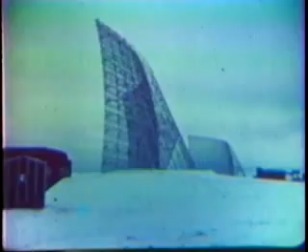Our ballistic missile early warning system tell us differently? 7, 6, 5. Not ours, but theirs. 3, 1. And if it is theirs, and this is ours? A better design on the drawing board is no immediate effective countermeasure.

Our birds must fly when they're required to. The high complexity of modern-day weapon systems demands the closest possible approach to absolute reliability. There is no second chance. So there must be absolute process control during system design and system manufacture.

Are these more imports from other lands? Or are they more exports of our own manufacture? If we are to compete successfully, both at home and abroad, our economy must expand, our industry modernize. To remain strong, to remain free, to enjoy the good life.

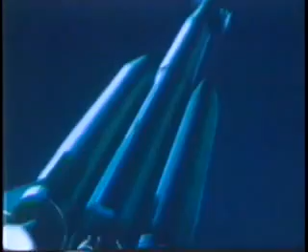We also need newer and better aerospace vehicles, and we need them fast. We need newer and better weapons, and we need to get them from design concept and into operation more quickly and at a reasonable cost.

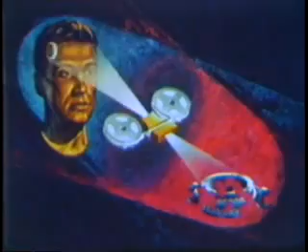We need new and better products for civilian consumption. Products which can compete with foreign goods here at home or in foreign markets. We must have modern manufacturing, as modern as we can make it. Modern manufacturing is a command performance.

Command performance. Well, we usually have enough command of our process to get the performance we want. Of course, it takes a lot of time to get from a set of new drawings to a finished product. But time is something we don't always have. The period from development to product is growing shorter and shorter. As someone said, time has collapsed.

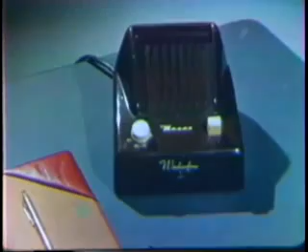Now let's try this process. Say the complete product is a Type 20K, and we're changing it with a modification of the Type XR. Now, suppose all you needed to do was to say into a transmitter, 3 Type 20K modification XR. Orders to the plant. That's right. You merely define what you want, and in a fraction of the time it would take conventionally, your product's manufactured, assembled, and ready to ship.

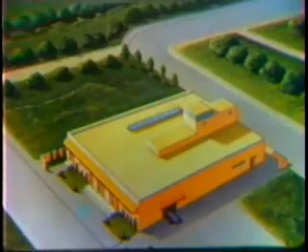And that component we were talking about is only one of many making up the complete product. How could you do all that so quickly? Not only so quickly, but in much less space. You'd need a much larger plant to do this by conventional methods. Oh, this is not conventional. Not at all. This is a modern plant. Really modern. What do you mean by that?

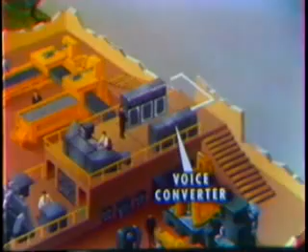When you give your command over the mic, which may be in the plant or remote, almost anywhere, the information feeds into a voice converter, which translates your language into a language which the computer can understand. The computer analyzes your request, then draws on its store of information to produce a series of tapes, which feed into a production control center. This center not only controls each of the machines, but the flow of parts as well, acting as a scheduling unit.

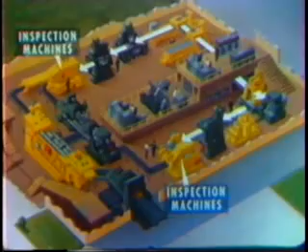Now all of the manufacturing units are actuated. Basic shapes are routed to production centers for complete processing. Completed components are then checked automatically by inspection machines, then sent on to a robot subassembler. Subassemblies proceed on to a robot for final assembly, and then on to shipping. That's what I call command performance.

Of course, I've oversimplified the process a bit. You mean you've been putting me on, don't you? Not exactly. This is not as fantastic as you might think. Take the computer, for example. Computers are fairly common today, although we still must talk to them with cards or tape rather than directly. But they're getting more sophisticated all the time. And from this information, a control tape is produced. Control tape for what? To control a manufacturing process.

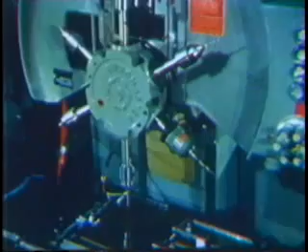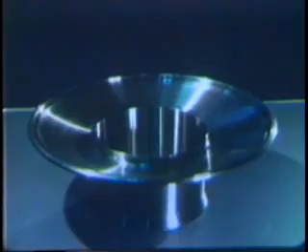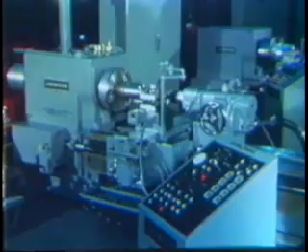Now, these machines are in existence today. Inexpensive tape-controlled drill presses. The more sophisticated turret drill presses. Vertical turret lathes, capable of high accuracy contouring. Tape-controlled engine lathes, with equally exacting contouring and thread-cutting capabilities.

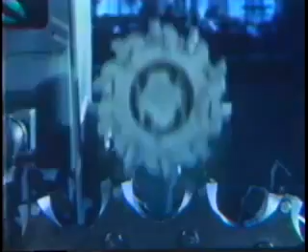High-precision multi-axis profiling mills. Machining centers that change tools, mill, drill, bore, ream, and tap. In many cases, they can complete the entire manufacturing process in just one setting. Fully capable of doing that job of yours we were talking about, and even more.

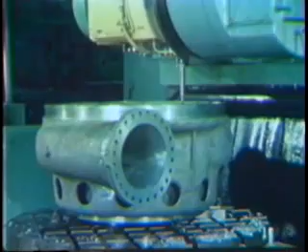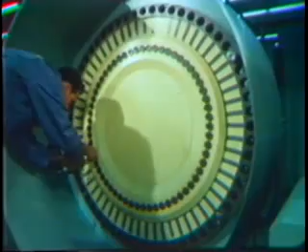Now, what different tools would you need for this piece? 6 different milling cutters, 4 sizes of drills, 4 reamers, 6 taps, and 4 boring bars. And where you needed 8 machines to use these tools, the whole batch is loaded into a magazine for use by this one machine.

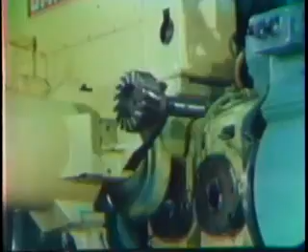All the instructions to the machine are on a punched tape. The intelligence on the tape tells the machine exactly what to do. This is called numerical control, which is one of the means of using mathematical definitions to furnish intelligence a machine can understand. There are many methods of accomplishing this. However it's done, it certainly shortens the chain of command and greatly reduces the opportunities for a breakdown in communications.

There's the same casting you would have started with in your conventional shop. But notice there's only clamps required. The machine itself will even make its fixtures from tape control if necessary. And there you are. All the machining done in only 45 hours.

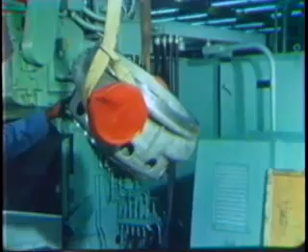How long would it have taken in your shop? Oh, about 300 hours to machine and 26 weeks of lead time, after you tooled up. Remember, the lead time here was only 2 weeks. If you need a second or third or fourth piece, you get them in a matter of hours. All exactly alike. Now that's performance.

What happened to automatic inspection you were dreaming about? That was no dream. They're already in existence too. And research and development are making them better all the time. On this machine, a probe is guided by a tape similar to the one used in manufacturing the part. The measurements are recorded for inspection and record.

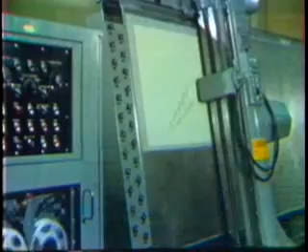But you still need an original detailed drawing, don't you? Not necessarily, but if you want one, it can be made from a numerical control tape too, operating a drafting machine. Often the drawing can be made at the same time the part is being made, using instructions from the same tape.

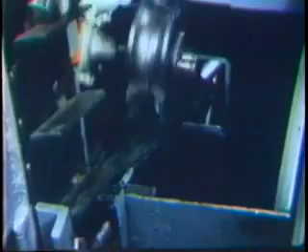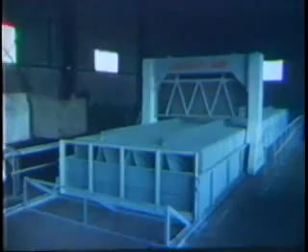I noticed the loading and removal from the machine is still conventional. But it needn't be. You'll find automatic loaders and transfer mechanisms on a lot of production lines today. This automatic material handler remembers every sheet in its inventory and will deliver it undamaged in seconds.

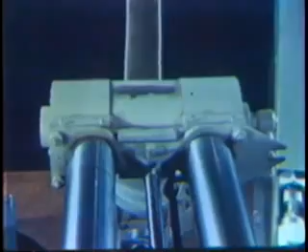This robot manipulator will perform a variety of handling operations. It can be easily taught to load, unload, and assemble parts because of its electronic brain. So you see, we have practically all the elements of our plan of the future. It's just a matter of time before someone puts them all together to make the dream a reality.

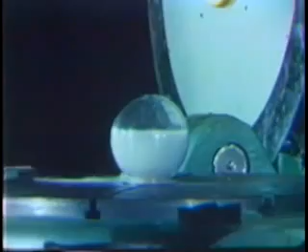I don't know that anyone has ever produced a crystal ball on one of these machines, but you don't need to be a fortune teller to realize that our success in aerospace depends upon our national capability to produce combat-ready systems with complete reliability. We must produce first, best, and at the lowest possible costs, which are consistent with reliability and reproducibility.

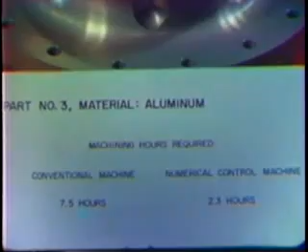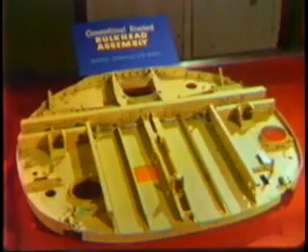This means that we must be able to manufacture from all sorts of new and exotic materials. It means we must be able to produce structural members with a high degree of configuration complexity. It means we must produce with greater dimensional control. Some large rocket engine inducers, for example, can't be produced to design concept by conventional manufacturing methods. It means that we must produce components which have structural integrity.

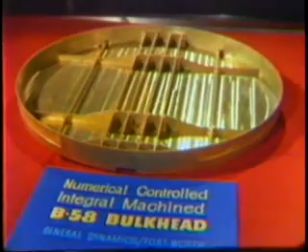This aircraft bulkhead was built up of over 90 different parts, requiring more than 1,000 rivets and high-strength fasteners. You can imagine how long it took to tool, machine, and assemble all these parts. And you can imagine the possible human error involved. The more modern one-piece bulkheads have greater structural integrity, but they were still expensive.

These one-piece bulkheads were first produced by conventional methods, using specially designed tracer-controlled rotary tables with many coordinated overlay templates and tracer patterns. It took 160 hours of machining time to produce one bulkhead, and at considerable cost.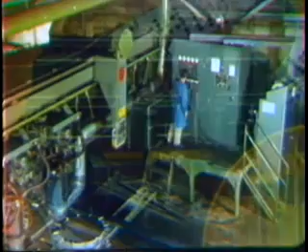The part is now programmed on a numerically controlled skin mill to machine 2 at a time. This requires only 2 sets of vacuum chucks and 9 reels of tape. The time reduced to only 9 hours per part, and the cost reduced by 80%. In addition, there's a 25% reduction in weight. Command performance? I'll say. But you can best get it with numerically controlled machines.

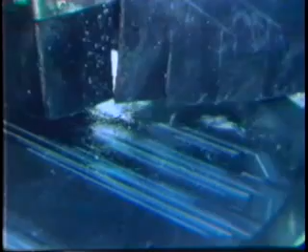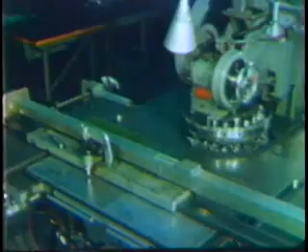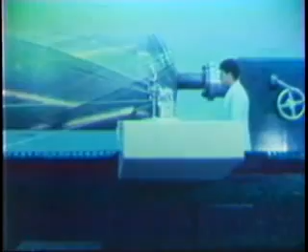Can this type of control be applied to other types of machines? Certainly. There are machines that automatically position and punch all types of panels. Machines which build up rocket motor cases by the controlled winding of glass filament.

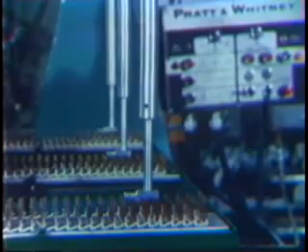Machines that position connector panels for wiring. Machines that position and mate the wiring connections on assembled electrical panels.

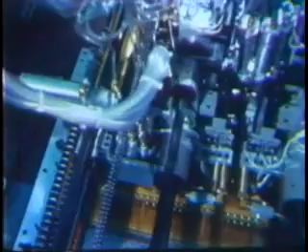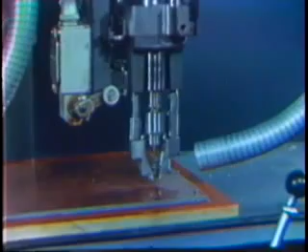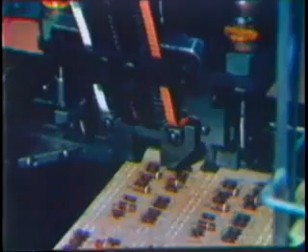Machines for drilling printed circuit boards. Machines for inserting the components in these boards. Machines for spot welding, which saves 72% in labor costs. This machine has proved invaluable in spot welding fuselage sections.

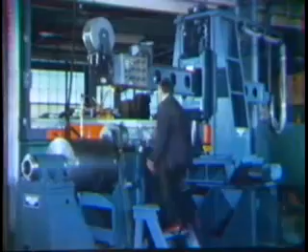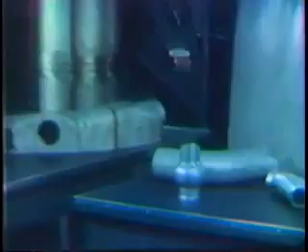The more complex fusion welding also can be performed by numerical control. The tape not only controls the positioning and movement of the arc, but also the welding factors, gas flow, current, and the like. In guiding the arc, the control permits blind welding down through one structural member to fuse it with a hidden member below. The result? A stronger weld, a member with more structural integrity. A more reliable weapon system.

Tubes can be bent by numerical control also. Tailpipes that fit any car precisely. Or the miles of plumbing used in modern missiles, and all without the need for separate jigs and setup time.

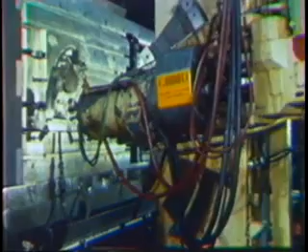By far the most versatile and flexible are the numerical controlled machines. For one-piece or production runs, they're the answer to involved machining operations. And for machine control, you can't beat instructions which are fixed and not subject to human error or emotion. Why, this tape could be sent anywhere in the world to a similar numerically controlled machine. And it would produce a part interchangeable with the one produced here from this tape.

May we backtrack a moment? Surely. Just how do the instructions get to the machine in the first place? Well, let's begin with your own sketch of some part. Make it complicated. We'll hog it out of a block. Let's use master dimensioning. Okay. There you are, with all the essential dimensions, but scarcely something a machinist could work from. That took you about an hour.

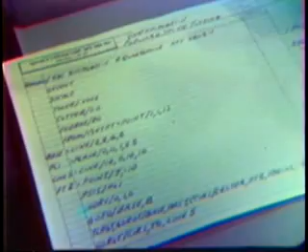Now, we'll take this to a programmer as the next step in tape preparation. And there's the program. Now, let's see, that took about an hour and 45 minutes. Add that to the hour for the sketch. And the 5 minutes it took us to get here. And the total's 2 hours and 50 minutes. Those words on there look sort of familiar, but different. That's right. They're a kind of pidgin English.

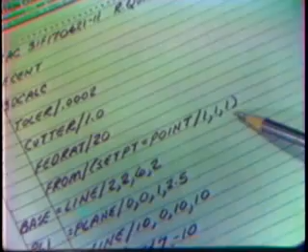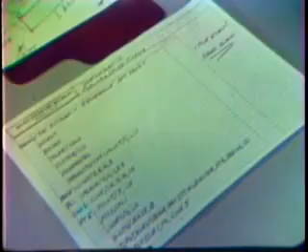This information will command the tool to start from the point called set point, which is defined as the point with coordinates 1, 1, 1. With the tool on the right, it is instructed to go right along the line base. At this point in the operation, the tool is sent forward to start cutting a previously defined circle about a previously defined point 2. Now here's that circle on the sketch. You can see it's a language that you can readily understand and use, and one the computer can understand too. As of now, conventional computers do not accept oral commands, so the instructions are put on punched cards or tape.

We're moving right along. Just 10 minutes for that job, for a total of about 3 hours. Now the computer operator gives the commands to the computer, which translates them into machine language. And here are the commands we'll take to the machine. We've now spent only 3 hours and 20 minutes. That's really chopping down lead time, isn't it? Yes. I expect it would have taken me weeks to design and tool for this job. It might be a good idea to think about modernizing then.

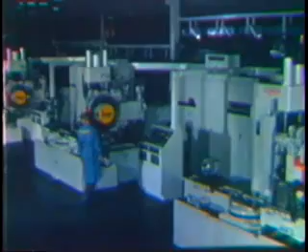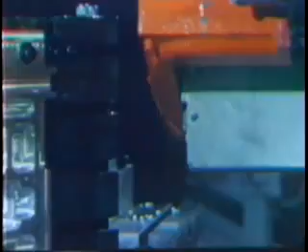This whole system's called numerical control? Well, the machines are operated by numerical control. When you talk to a computer, though, well, that's a little higher order of communication. I suppose you might call it symbolic control at that point. And look, your part is already being manufactured. There's your part. Just 4 hours after you started making the sketch. You want to check it out? You bet. Amazing.

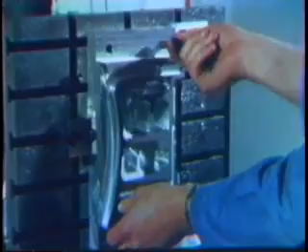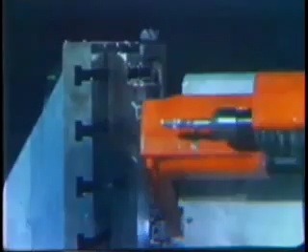Absolutely amazing. You see, what happened was that the machine did what machines can do best, and humans did what humans can do best. You did the designing, the creating. The programmer planned the process from his knowledge of machining and the particular machine. And being human, you were able to start a chain of command to the machine, a very short and very exact chain. As a result, you obtained a superior performance from the machine, far better than by conventional methods. And you get the same performance time after time, because the commands cannot change. And that's why you call it command performance.

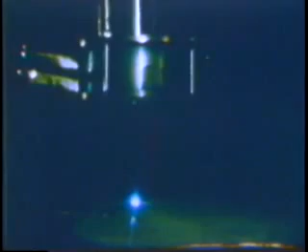That's right. Well, what about the actual joining, forming, or removal of metal? What's new along these lines? Plenty. Electron beam welding, for one thing. Here, even two dissimilar metals can be permanently fused together by the high-velocity electron bombardment in its vacuum chamber. Electrolytic machining, for another. The cooling holes in this turbine blade were eroded to exacting tolerances by this stem drill. The hollow drill electrodes never touch the material, so they need not be reset or replaced.

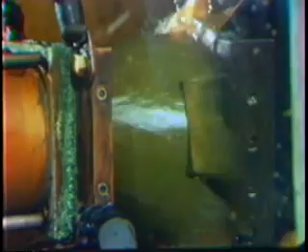Just the opposite of electroplating, huh? Correct. This finished turbine bucket was shaped from high-temperature material. And here are the shaped electrodes that were used to do it. The process replaces a dozen conventional machines and produces a yearly savings of about 80%. When subjected to enough pressure, metals become plastic and are easily formed. This vertical shear former produces turbine compressor shafts at a savings of $1,500 per part.

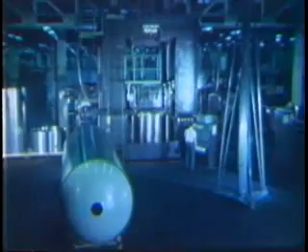Similar machines will turn out shapes such as cylinders, cones, and rocket motor cases from practically any metal, including many of the exotic alloys.

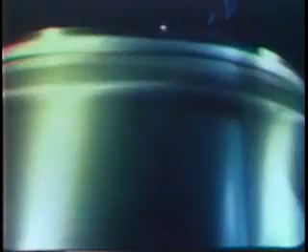Or suppose your product needs formed parts, like this. This machine pre-stresses metal to its yield point and has a tension control system, so that forming is accomplished with high accuracy. This jet engine part was formed from Rene 41 in just 2 minutes, and the savings over conventional methods is 80%. A similar type of process will give you savings of up to 90% on drawn components like this, and permits the use of inexpensive dies.

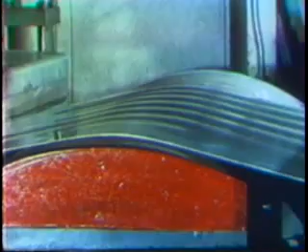This blank holder, adapted to a conventional press, pre-stresses the metal and makes it more flowable than plastic. By adjusting the stress, almost any metal can be formed using the same die. Normally, 3 draws would be required to produce this part, with 270 hours of handwork for finishing. But here it is, produced in 1 stroke, holding its shape without springback, and maintaining that shape throughout subsequent welding.

This hydroform turns out complex, shaped parts in seconds that formerly took hours to fabricate, assemble, and weld. The rubber bladder reduces tooling to only 1 inexpensive die. Want more savings in forming metals? Perhaps electromagnetic metal forming is the answer.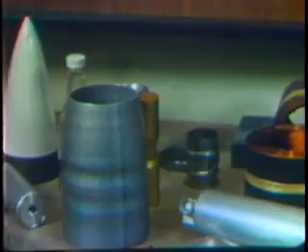This process uses powerful magnetic fields to swage, expand, compress, coin, shear, and assemble conductive metals without mechanical contact with the work. This machine uses the explosive power of man-made lightning to form parts.

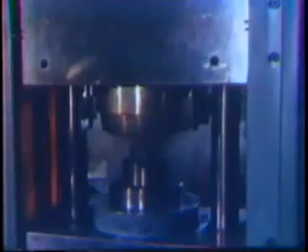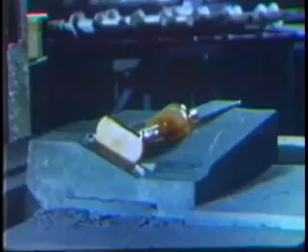What about forging? How about that? That's high energy rate forging. These machines will deliver a terrific amount of energy in a split second to forge such materials as tungsten or even cast iron, as well as the usual materials. High-tonnage mechanical presses also offer great savings in the production of precision forgings.

For testing electronic systems, there's automatic testing equipment. Here's a complete checkout of a wiring harness. This machine checks missiles, computers, servo systems, and the like. The results of the tests can be recorded on a printed readout. And the savings? Well, in addition to the time, this piece of equipment replaces 150 separate pieces of test equipment required on many of the complicated checkouts.

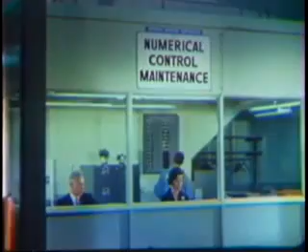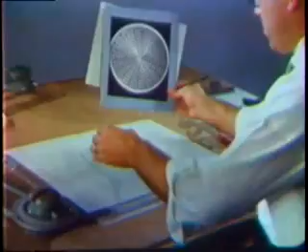Imagine what all these methods of modern manufacturing are going to do for the designers. And of course, you've seen only a few of the many new methods available today. No need for them to be limited by the restrictions of conventional manufacturing. They can now design a part to do the best job without compromise with manufacturing limitations.

I doubt if there's a machinist in the world who could have turned out this part and met the required specifications. Yet it's a vital part. And I know that without modern machining, it could never have been produced in time to get our missiles in operation on schedule. And believe me, we must be on schedule in these areas.

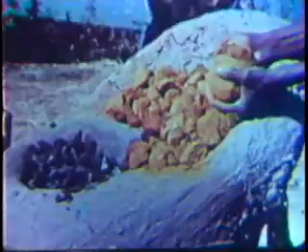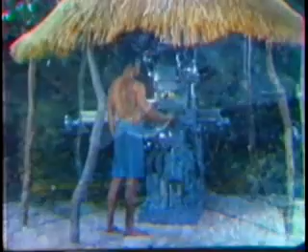You know, today in some sections of the world, the smelting of iron is still a primitive process. And metal forming is equally crude. But some of our manufacturing processes still border on the primitive. While even the most modern standard machine tools are efficient for general applications, they will not readily accept the numerical control input so vital for the effective production of aerospace vehicles.

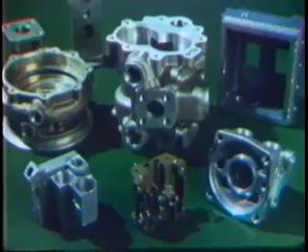We must modernize our manufacturing methods and go from design concept to finished product as quickly as possible. We must keep the wheels turning the best way we know how. We must apply what we know today and search for ever better methods. This is a command performance for the survival of industry and our country.

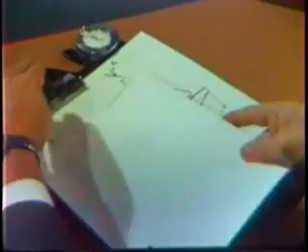Say, do you still have that clipboard? Sure. Here it is. Why? I want to write myself a note so I won't forget something. See? This is going to be a command performance, too. Good idea. Because the Defense Department expects its contractors to maintain a modern base in their facilities. In keeping with the advance of aerospace technology, we need the productivity, reliability, and repeatability that only modern manufacturing can provide. And we all need the savings which can be effected in both time and money.